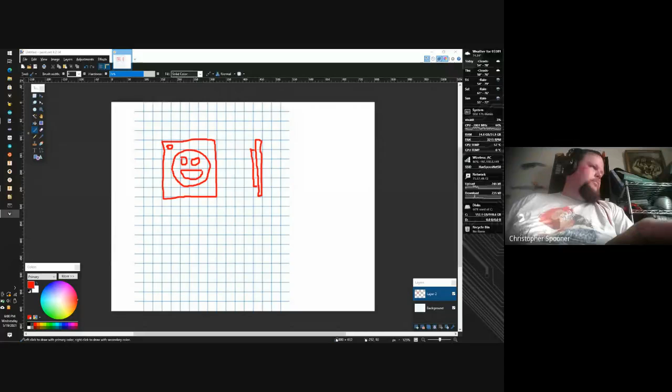For the video, we have this model keyring we're going to build in Fusion. So we're going to start off.

And how do we start any part in Fusion? What was the default way we want to start things?

You're going to make a sketch? Yep, we always start with a sketch. You can build three-dimensionally first, but that's not how I work. I find it harder in a lot of ways, and it's hard to make really specific things.

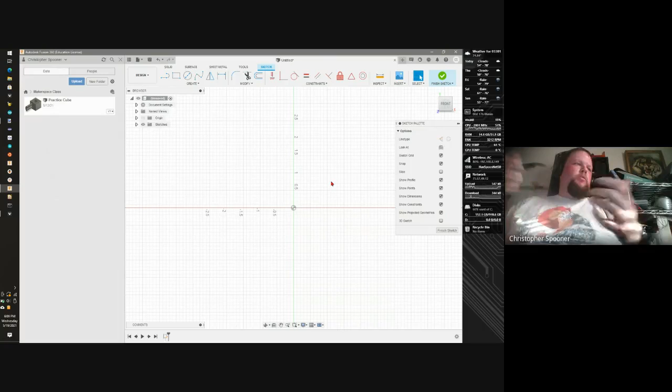So I'm going to build, working towards the front, so I'm going to pick this plane over here. So I'm looking at the front of my key. If you start in a different plane, it doesn't matter. It's a three-dimensional object. No matter what direction we put it, it's going to be fine. It's just going to change which orientation shows up in the 3D printer or whatever one's ready to go.

Now under Create, we have a couple options for rectangles. We have the standard 2-point rectangle, which does the corners. We have a 3-point, draw one side and extend out, or we have a center rectangle.

If I go back to my drawing, I'm going to switch my color. I'll make this pen smaller. If you look at my thing, really all my features are kind of built around the center, around this center point. So if I use a center point square, it's going to make my life way easier.

Does everyone see why that would be? It means when I do my circle, my mouth, my eyes, everything's sort of based around that center origin. So we're going to pick the center rectangle.

I'm going to start on the origin, and drag out and click again. I'm not going to worry about the size or dimension. I'll dimension it after the fact. I don't like looking at the dimension I'm drawing. I find it distracting, and I'd rather work at shapes than specifics.

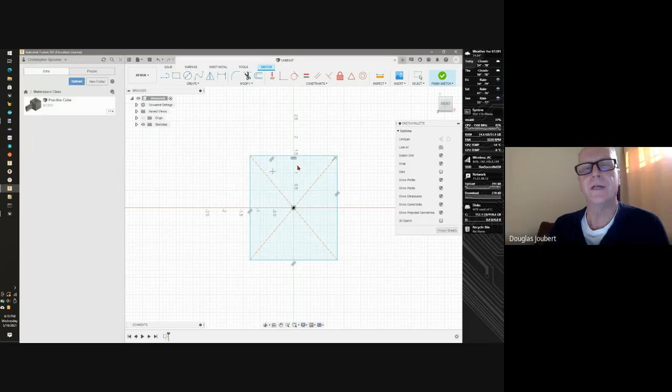Hey, Chris. Yep, I have a question. Of course. Well, maybe I figured. Maybe I know. You went from the center point - the last class, you went from the center point outward, so the cube was kind of attached in a corner. Yep, so what's the difference?

The first time we used the line tool, we built with the line tool, and I started at the origin and drew our shape this way. Now, a square is a square is a square, but remember when we drew our circle, we had to place the center hole on the thing. We had to dimension where that hole goes. If I build from the origin, I can use that origin to build other features. Because my circle is centered on the origin, if I keep my origin in the center of my shape, everything's going to be less annoying.

Got it. Chris, which of the 3 choices of rectangles did you choose again? I'm sorry, I wanted the center point rectangle. Okay, the center rectangle. We just lost Doug.

All right, I'm just going to drag out. I'm not going to worry too much about it - by keeping myself at my center point, center shape, I can use that for later features.

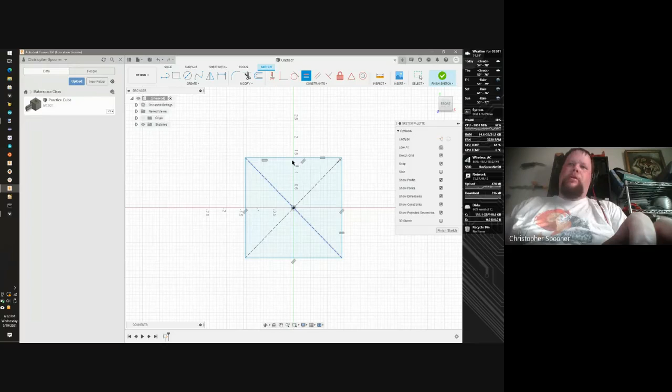Now, before I put dimensions here, I actually want to - because I know I want a square keyring - use the equals constraint to say this top side is equal to this left side. I could also do the top to the right, or the bottom to the right, or bottom to the left. It doesn't really matter. But now if I hit escape and try to drag it, it's always going to stay square.

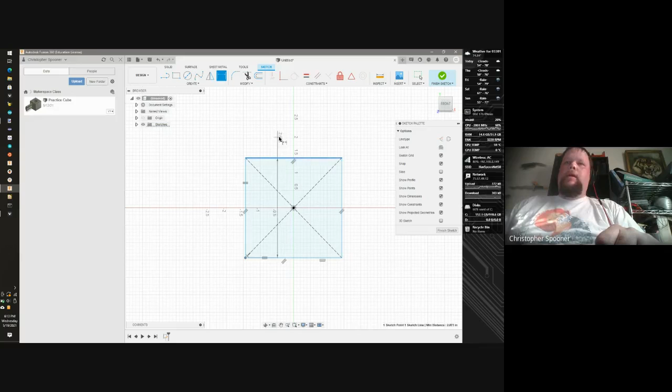All right, we're now going to set our dimensions. I'm just going to grab the top, and I'm going to dimension that way. It doesn't really matter, 1.5.

Notice as soon as I put one dimension on it, it turned black. Why did it turn black with only one dimension? What does black mean? That you are constrained. Yep, that is the shape it is, it has to be that shape, that's the only shape it can be. Because I used a rectangle and said the top and the side are equal to each other, as soon as I set one side dimension, it has to be that shape. There's no other shape it could be.

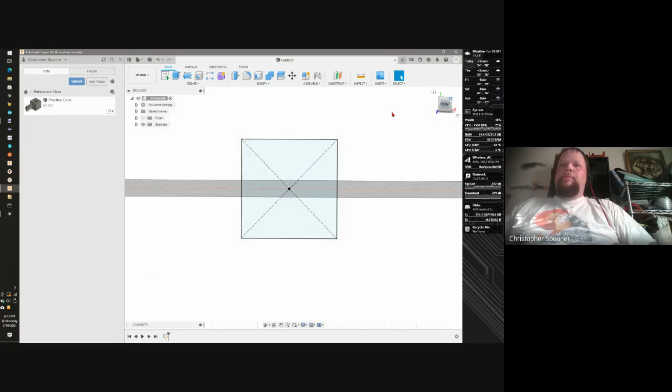So now that I have my square and it's locked in place, I'm going to finish my sketch. I'm going to go look at it three-dimensionally so I can see what I'm doing. And I'm going to extrude it 0.1 - we'll go 0.125, an eighth inch.

Any questions or anything? It's much easier to help you one step at a time than helping you after 4 or 5 steps. So if you get stuck on a step, don't try to just push through thinking you'll catch up, because everything we do depends on the previous step, you just fall farther and farther behind. It's easier to help you first.

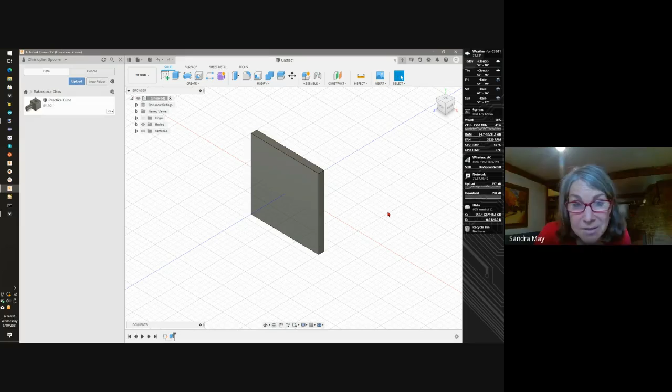You made your keychains 3 inches wide? Nope, 1.5 inches. Okay.

Is there a way I can change my dimensions once I've made it a 3D thing? Yes, you can. All right, let's talk about that right now, actually.

One of the tools I didn't talk about before is the timeline. On the bottom of the screen, we have every step we do recorded. We can go back in time and change things, sort of like Back to the Future. Downside is occasionally we break things and end up in Biff Tannen world. So be careful, because you can break things badly. But most of the time it's pretty safe.

So we're going to double click on sketch 1, and then double click on the dimension, and I can change that to whatever I want, then finish sketch, and it will update. So if I go, I want this to be 1.75, it will update, and that shape is now bigger. It's hard to tell because there's no point of view, but...

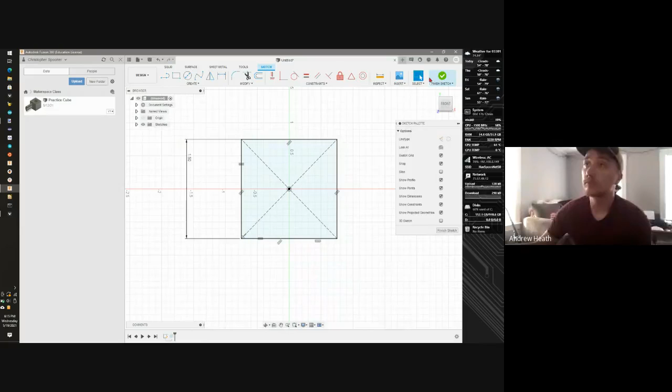We're ready to move forward? I'm ready. All right, so now we have our square. There are 2 ways we can go from here, 2 features we can work on. We could either do the face or do the keyring hole. Again, it doesn't matter which one I do, they're completely separate pieces. I typically do the face first, but you can do either one. I'm going to do the face, so let's start a sketch on the front of our slab.

This is where having ourselves based around the center makes our lives easier. So if I start my circle on the origin, the center is already located. I don't have to locate the circle, I just have to size it.

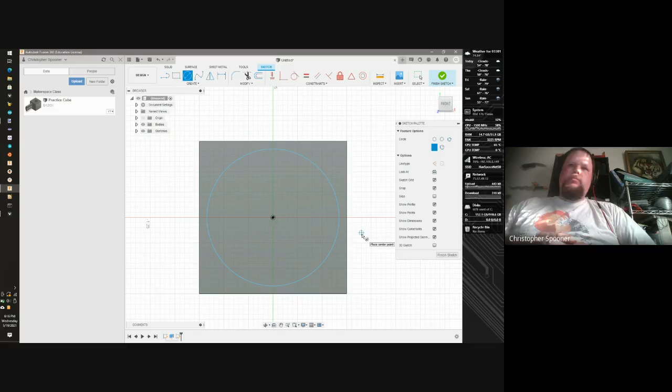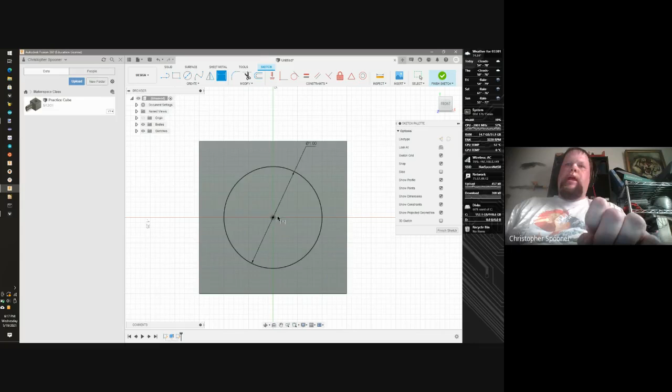Now I'm going to dimension myself to 1 inch. Notice I just had to do 1 dimension, I didn't have to locate the center point of that circle, I didn't have to fight with it. It just places and locks without the dimension. If you didn't have it start in the center point, you'd have to dimension the center to the side and the center to the top or bottom, and say it was 1.5 divided by 2 or 0.75, I'd have to do all sorts of math and I'm lazy. I can just place it and be done with it.

So I'm going to finish sketch, go back to 3D mode, either clicking a corner or clicking the house, and we're going to extrude, grab the circle, and go 1.25... oh gosh, 0.125, 0.125.

I'm going to click back on my extrusion in my timeline and say 0.125. That's the nice thing about working in CAD, I can go back and change stuff as I'm going. 0.125, an eighth inch or eighth of an inch, is a good size for 3D printing. It's also good for laser cutting because you can get plywood in that value. So whether you're laser cutting or doing this for 3D printing, picking nice, reasonable sizes makes your lives easier.

So everyone has their sketch somewhere along the way. Dude, all right, can you share your screen quickly? Because I had it, and then... yeah.

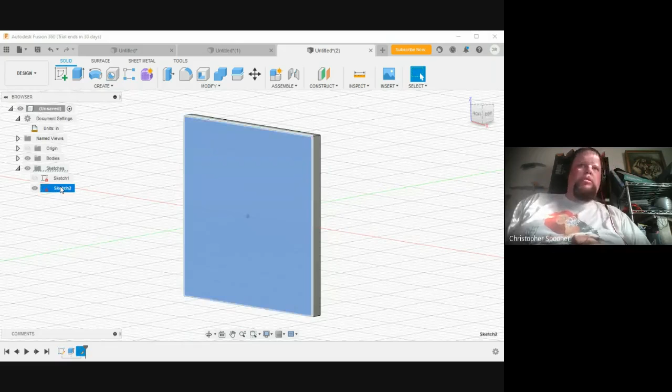Let's double click on sketch 2 so we can take a look at the sketch on the bottom. Yeah, sketch 2 there, that works too. Let's double click on it so you're editing it, and just draw the circle again. I wonder if you somehow...

Dimension, and a hotkey for dimension is D. Click on the outside of the circle. Click again. 1, enter. No, 1. Finish sketch. I wonder if it got dimensioned to 0 somehow. That's the other possibility, is it went to 0?

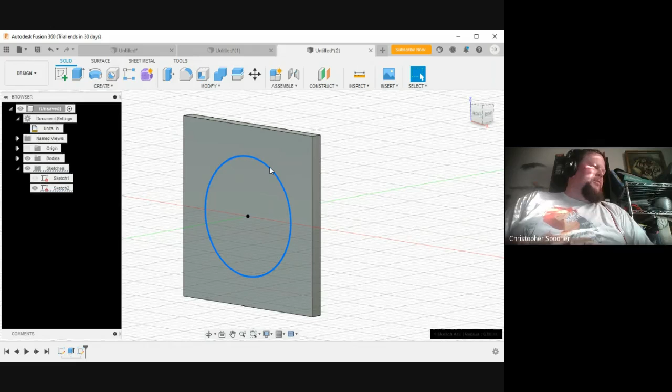As I said in the first class, Fusion 360 is my tertiary CAD software. I reach for Inventor by default, which is Fusion's big brother. And then, okay, we're gonna click the extrude button up top.

It's next to the sketch button. Click on the circle, and then type 0.125 in here? Yep, you can actually type it there or in the little pop-up just to the corner of it. Either one does it. Correct. All right.

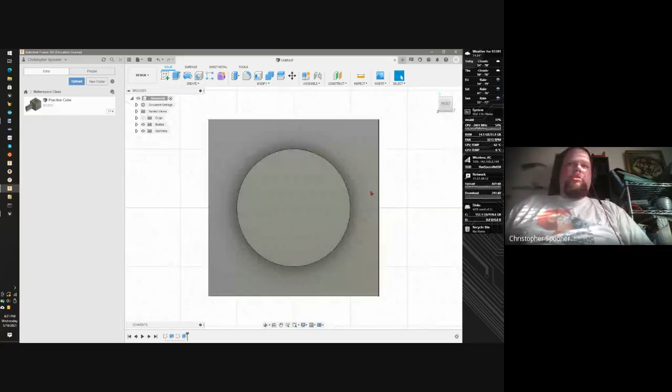So occasionally Fusion will catch me off guard because it's not the one I use all the time, but it's the most convenient for hobbyists. All right, so we have our face. We're doing good time-wise, so let's make this a little fancier. We're going to make our eyes so that they are domes instead of just cylinders.

So what's our next step? What do we have to do before we start drawing the eyes? If you want to create a feature, just start a sketch. Basically, sketch 2D, 3D, 2D, 3D, every time. I'm going to start with a line, and I'm just going. So for reference, I'm going to draw just this left eye, and then we're going to mirror to get the right eye. So we're going to draw like a half circle.

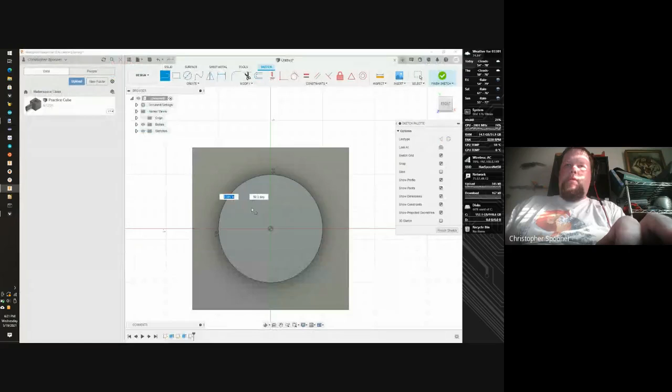So I'm going to start by just drawing a vertical line. I don't worry about the size, I'm just placing it. I'm going to draw it, then hit escape to make sure I'm not in the pencil anymore. So just a line right now.

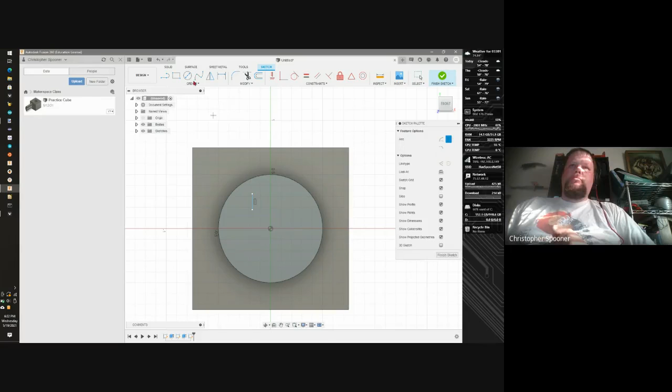Now I'm going to go to the arc tool and go to the 3-point arc. Create arc, 3-point arc. And I'm going to click on the top of the line, the bottom of the line, and then drag out. Let me do that again so you can see that. Create arc, 3-point arc, click on the top, click on the bottom, and then drag out and not worry about it too much. Arc, 3-point arc, top, bottom, drag. It doesn't matter if you go left or right.

We're going to fix this guy as we go. I'm going to hit escape to make sure that's cool. I want to actually demonstrate something. 1, 2, okay.

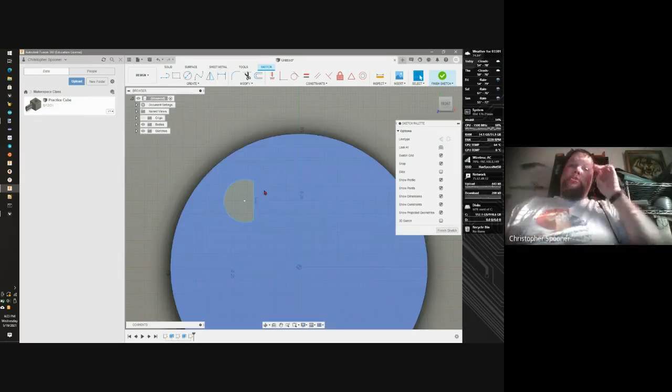First thing I need to do is, if it didn't by default, and I found that it kind of wants to, I want to put this point on this line. We're going to do a lot more constraints this project than we did with the practice cube. In this case, we want what's called a coincidence, I want this point to happen to be on this line. It just happens to happen, so it's a coincidence. So this point on this line, that'll give me an exact half circle. It also locks the center point of that thing and turns it black because that center point is now constrained.

So I should have a nice orange wedge right now, half circle. Now we need to start throwing some dimensions. Can you just do that one more time? I missed how.

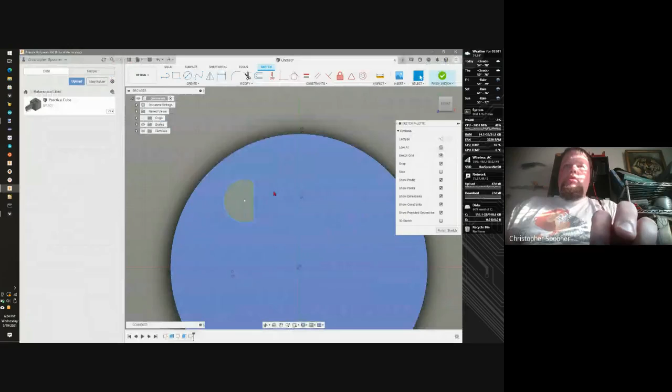Of course, no, that's fine, so I will go back. So create arc, 3-point arc. Click on the top, click on the bottom, click somewhere. This white dot is the center point for the arc. I'm going to use coincident, that this dot happens to run into this line. And the dot should turn black. And hit escape to make sure we're outside that tool as soon as I'm done. I always just escape whenever I'm done with anything, because you don't want to be in a tool and then have it do stuff to you.

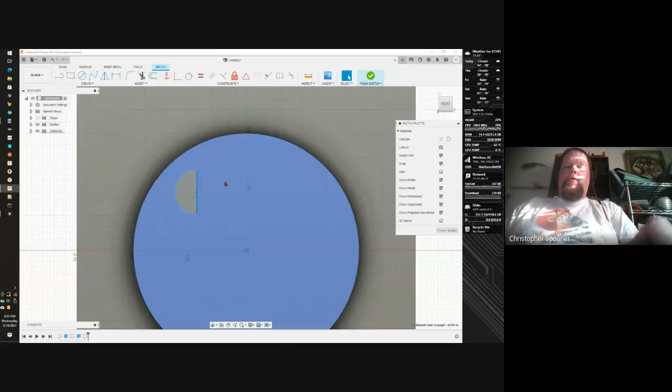Because I've had it all of a sudden start stringing lines and locking things together. So I go back to my drawing. These circles look like they're almost a square.

So maybe we'll go, so I'm going to dimension. I'm going to click on the line. I'm going to set this guy to be 0.2, so not quite, but almost a whole square. If we don't like it, we'll change it later.

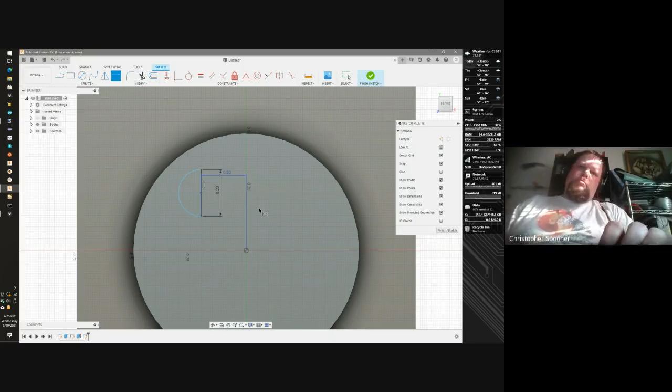Now we're going to dimension from this line to the origin. And I'm going to go 0.2 also. You might find it looks funny. If it does, we can always fix it.

Now, it's not all the way black, and I'm not quite sure why. I actually am, but I want to test it, so I'm going to hit escape, and grab onto it and just see where I can move it. And hey, I can still move it up and down, so that means I still tell it where this is vertically.

So I'm going to throw a third dimension here. I'm going to grab the bottom point of this line, and the origin.

So let's do it again. Dimension, helping me. With the bottom point and the center origin, I'm going to drag straight over this way, and go 0.1. Again, it might look funny, but I can always adjust it later.

So there's a bunch of dimensions on there. Is there a way to... hold on a second, I'm just...

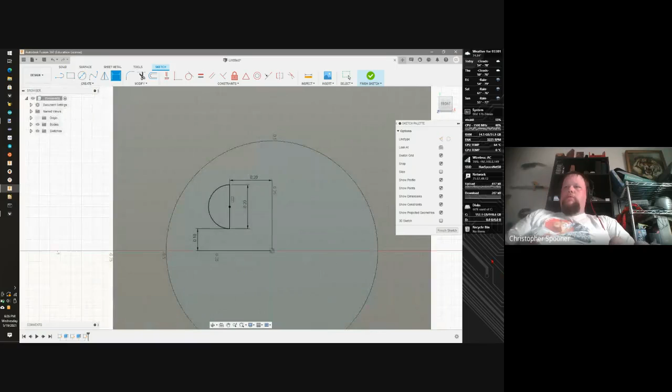Fusion's gonna be angry at me for a second. Oh god. Fusion's very angry at me.

Is that easier to read? Okay.

For some reason, I never thought of changing my screen scaling when I'm doing these, but I should. All right, so now we have our half circle.

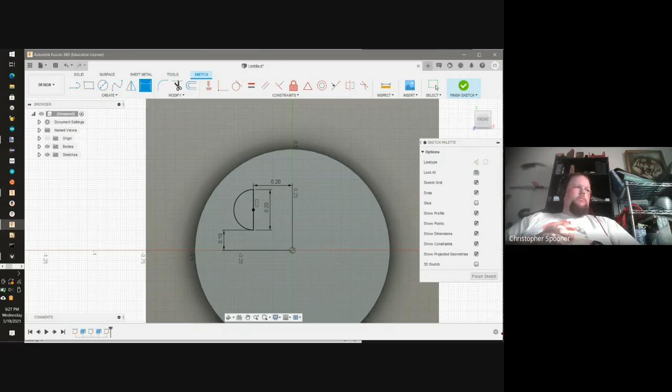Does anyone need help? Why is Inventor opening? Go away.

All right, do you want help? If you do, just share your screen. I'll gladly, yeah, I can do that. Yeah.

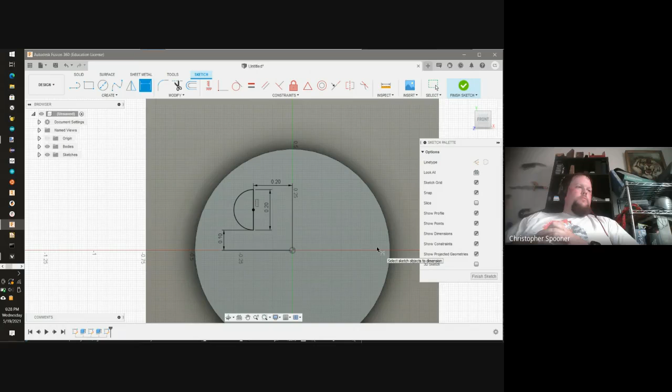That looks good. That's, I think when I go to dimension stuff, I seem to be having issues, like I'm clicking it in the wrong order, or all right. Let's take and hold on, I need to biggen.

And that's what, okay, so can you take and let's do it. Let's take and that's fine. Let's delete that 0.2 dimension because the 0.1's fine.

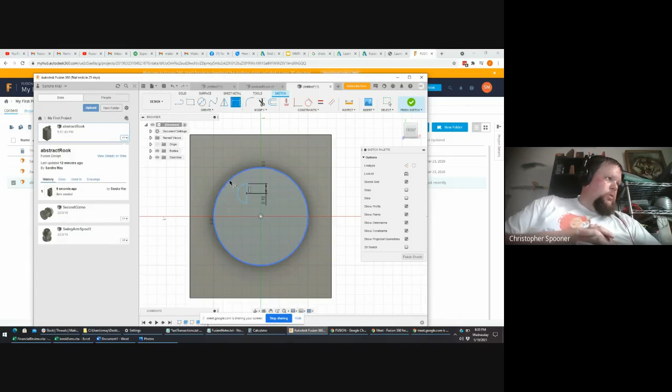Huh. There we go. All right, so let's click on the side of the circle. You're in dimension mode, yep. Click on the side of the half circle, the line part, the vertical line.

Is hit escape, control Z going to work? Just hit escape, just hit escape. Okay, escape. All right, go back to your dimension tool.

And click on the line. So we want to click on the vertical line portion of the circle. And we're going to click on the origin now. And now go move your mouse up and down. Yep, click, good, just click.

Okay, let's make that 0.2. All right, and now let's do the bottom corner of your half circle. Click there, now click on the origin.

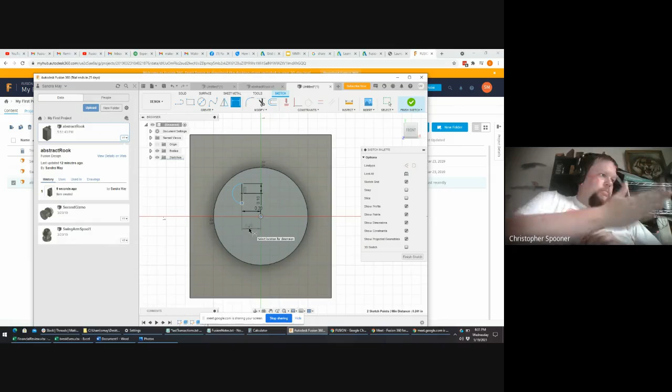And now you move your mouse to the left or right. No, we want to move it left or right of the thing, and you want to make sure you're above the origin but below the point of the thing. Yep, move it down a little bit more. Yeah, right there, click. Yeah, 0.1.

So what's happening, and I can show you on my screen. So let me resume presenting for now. All right, so what's happening? I'll just mention here that Fusion is trying to help you, and I find every time it tries to help you, it often makes things worse.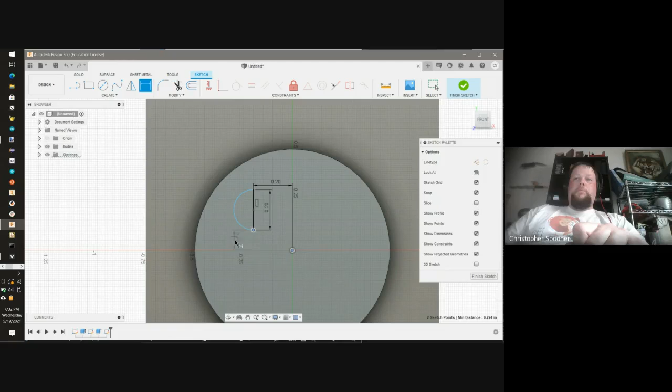So it's trying to guess: do you want a horizontal, a direct, or vertical dimension? And based on where my mouse is, it's going to change the direction of the dimension. And these are all different numbers. This is 0.2, this is 0.224, this one's 0.1. And it depends on which way you're laying your ruler. So you need to be careful which way you're dragging your mouse.

The trick is to always drag your mouse directly perpendicular to the way you want to measure, sort of like pulling your tape measure. Read your lines perpendicular to the direction you're looking at. Does that make sense? If I have a thing, I put my tape measure, pull it out, and read a line going this way. That's what was happening—Fusion was helping you, and it wasn't actually helping you.

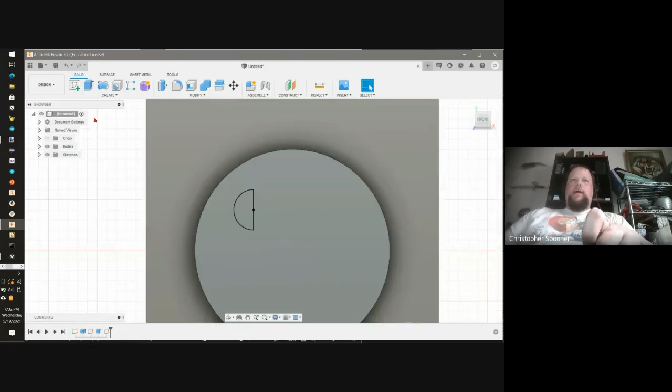All right, so we have our half circle. Is everyone ready to move forward? I'm going to finish the sketch, and this time, instead of extrude, we're going to click revolve.

Now we need two things for revolution. I need to have who are we revolving, which is the half circle, and then I need to tell it what the axis is. So I'm going to click down on axis, click on the line part of my eyeball, and say join. I'm going to make the eyes stick out.

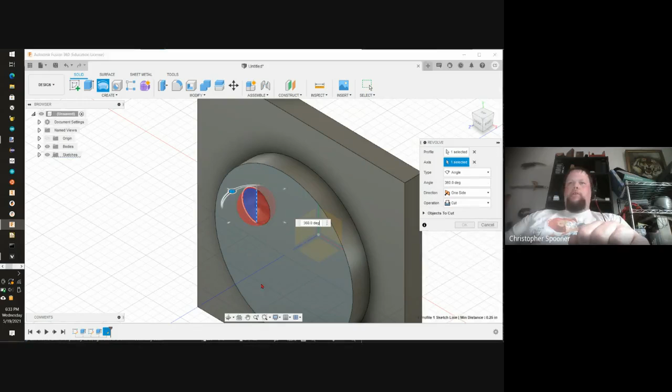Okay, escape, and I'm going to do it again. Revolve. Who do I want to revolve? This half circle. Which way do I revolve about? This line right here. And I want to make it a join.

I could cut it out to make dish eyes. Either one works, both work well for 3D printing, although they will not look great if you don't have your resolution set higher—you get a stepping effect, which you probably talked about in your 3D printing course, I hope.

Have my one-eyed smiley face right now.

Now we really want our eyes to be symmetrical. I could go and start our sketch on another thing and dimension it and all that stuff, but that's awful. Why would I do that?

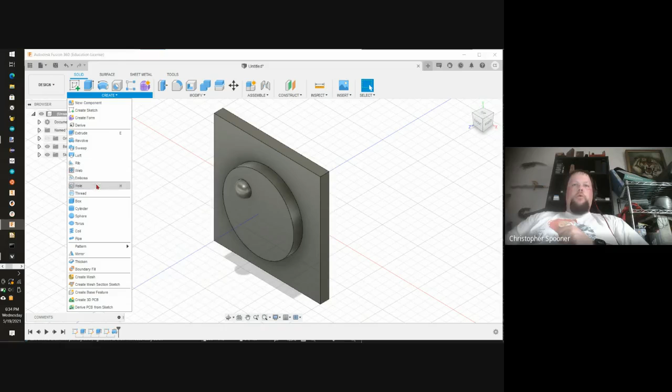There's a tool to do this. Under create, we're going to look down, and we're going to look for mirror.

I keep losing mine when I do things. That's okay, I had the half circle, I did what you did, and then I lose them every time. What are you doing? Let me share your screen, I want to watch you do it because I need to see what's going on.

We're going to hit Control Z. Must be hitting something—let's hit Control Z and see if it undoes itself. All right, I'm sharing. Okay, hit Control Z. Just hit Control Z. I want to see. Haha, you did do something. I don't know what you did, but you did something.

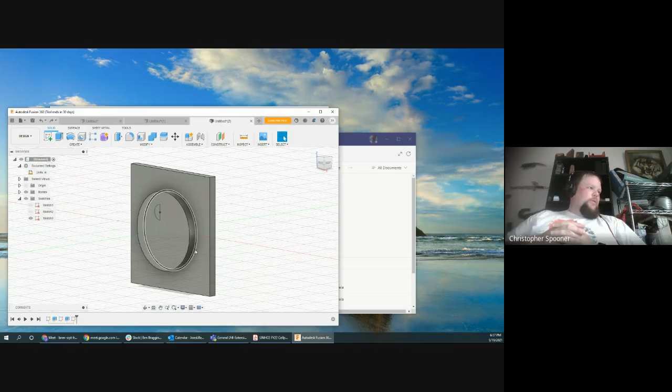Good, good, good. Now hit Revolve—okay, that was in create. Okay, revolve, so good news, you're not crazy. Something weird, I guess. So you need to select the axis. Click on the line part of the half circle, and we're going to go down to the bottom where it says cut and change that to join.

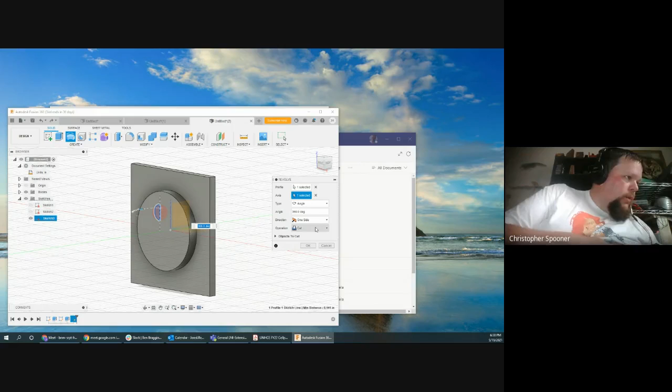Okay, double click on the extrusion 3 at the end. Nope, on the very bottom on your timeline, there's a blue thingy—the last one. Double click on him.

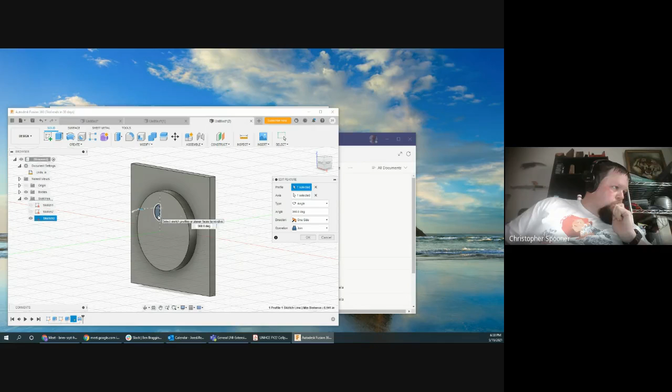Okay, click on... heck, okay, click where it says the first one—first selecting your half circle. Click, good, and I'll go back to the axis. Oh, then click on this. Yep, and then click on the line.

Something's weird. All right, pin this. Okay. All right.

Okay, we're going to Control Z to undo this whole thing. I will undo it so we still have the half circle. Undo, control Z again. Okay.

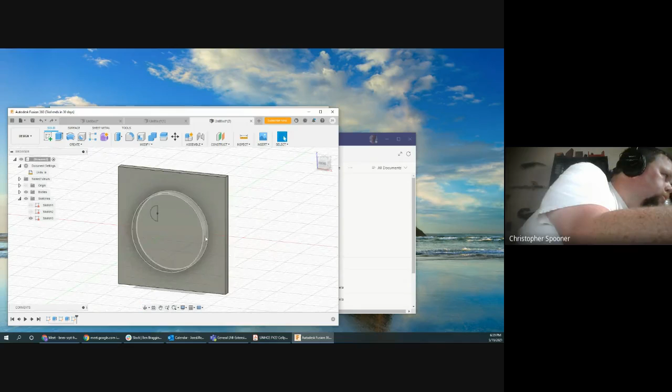Let's hit Revolve again. Yep, hit the revolve, go up to the top. Yep, there, up above it. All right, and we're going to click on the half circle. Yep, and then you're going to click on the edge of the thing. Yep, good, and hit OK.

Let's see what the cut does, I just want to see—do we get a dish? Huh, very interesting, very interesting.

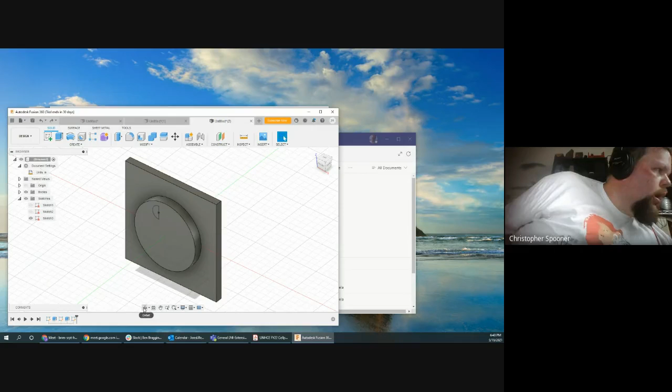I don't know what I'm doing. Sorry, everyone. No, that's fine. Let's go back, let's undo again. Control Z. I see it, I see it. So I need to hold on one second, I need to see how to fix this. So your sketch, you did your sketch on the rectangle, not the circle.

So I'm just trying to figure out how to redefine. Yep, so I'm just trying—hold on one second, I'm just trying to remember how to change, redefine a sketch.

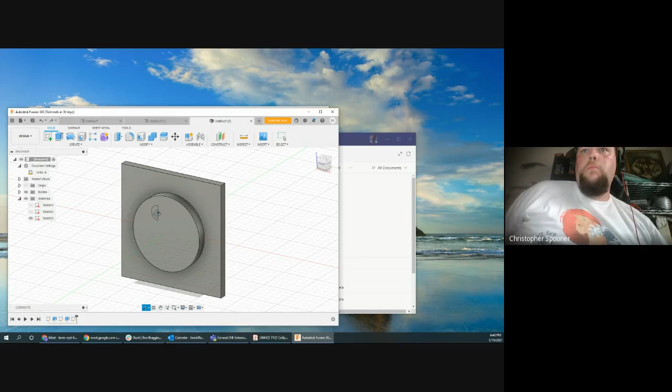Oh, yeah. How do I edit a sketch?

Do you just want me to redraw it on the circle? Yeah, let's do that, I can look next time. There's got to be a way to do it because I can't imagine Fusion won't have a way to redefine where the sketch is, but I don't know where they put that button.

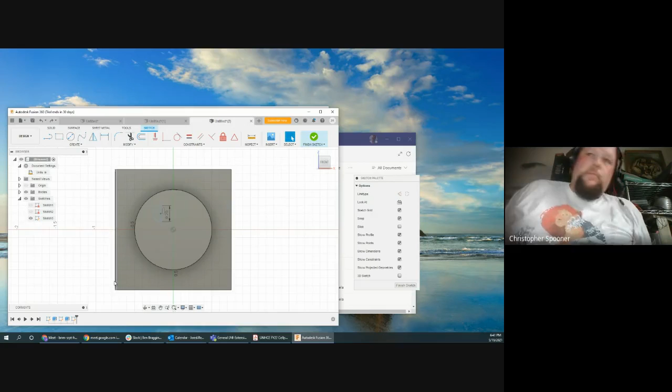Yep, back up. One, keep going. Control Z. Now start your sketch on the circle. Yes, and the reason, there you go. Notice you can now see the grid on top, their graph paper is on top of the circle, not just there. So, vertical line, quickly.

3 point, hit escape. Okay, great. Arc, 3 point arc. Top, bottom, click, coincident.

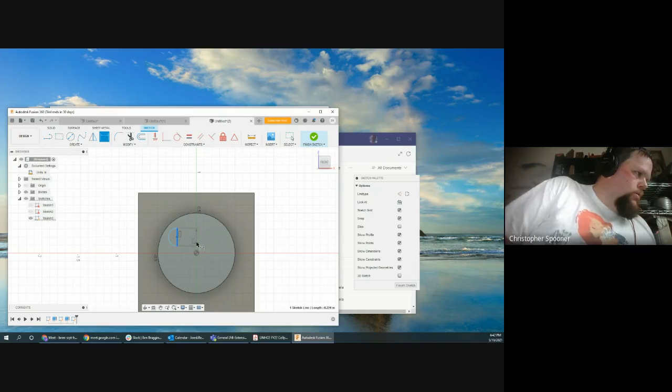Yep, click on the center point too. Dimension, this is the D key. Or click on it, click on the line. Yep, click, drag out, click, point 2.

Now click on that. Yep, click on there, click on the origin. Yep, click, that was point 1. And now one more, the line to the origin and go up. Click, point 2, 2. Yep. Now finish sketch.

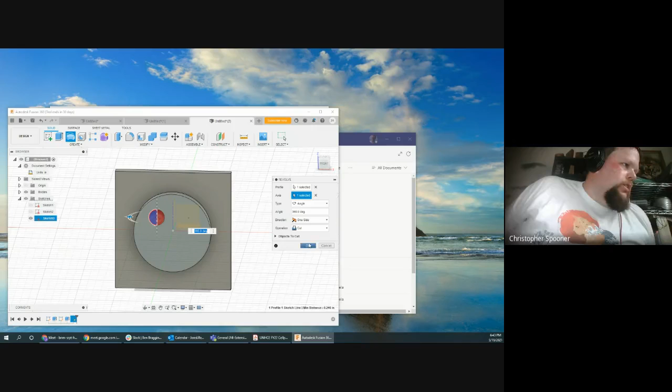Revolve. Click on the circle, click on the axis, select axis, yep, and go. Yep, click on the line. And now change that to join. Hit OK.

And the reason it disappeared was because you were drawing a circle inside the 3D object, so you couldn't see the circle. If you had cut it and then we 3D printed it, you would have had a spherical void where the eye was, and that's what was causing weird problems. It's okay, I will definitely research how to redefine a sketch for next time.

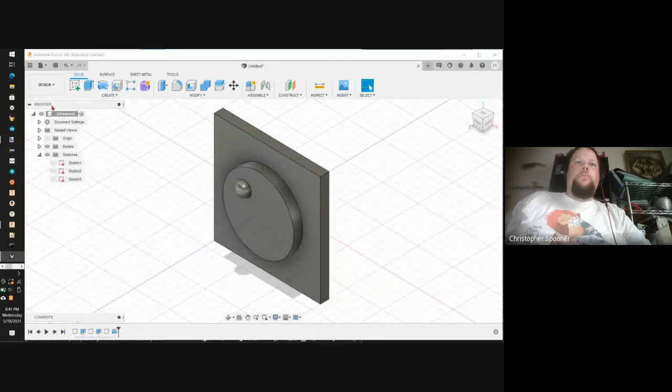All right, so now we have our single eye. We're going to take and mirror this so we don't have to do it twice. So the first thing I'm going to do is resume presentation, and then I'm going to expand my origin so I can see all my things over here. That's the first thing I want to do, click the little arrow next to the origin so I can see all my things.

I'm then going to go down to create, all the way down to mirror. The first thing I want to do is mirror a feature. That feature is this revolve. And I'll do this twice, so don't worry if you miss that. Mirror plane, I'm going to select that plane there and hit OK.

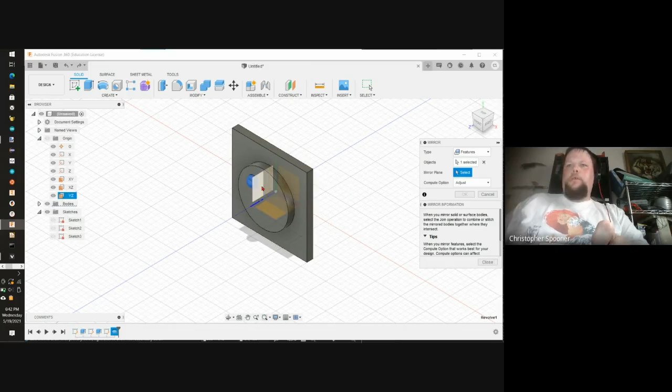Okay, create, mirror. Who do I want to mirror? This circle, and it figured it out when I clicked on the circle. Mirror plane, select that one there, the YZ plane. Hit OK. Boom, 2 eyes.

One more time, mirror, plane mirror, that sphere, or I can click on here. Mirror plane, I can select, I can mouse over them here. That one, hit OK.

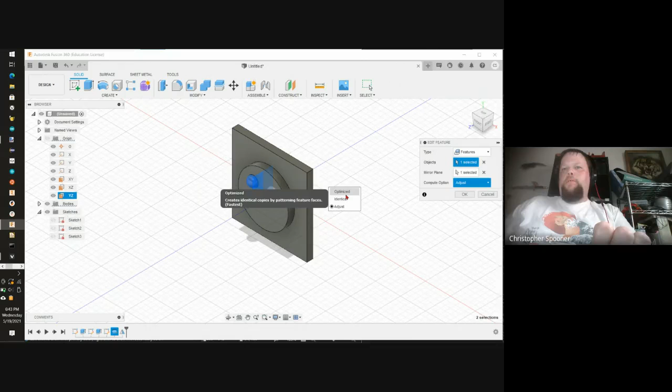What was the last one where it said adjust? Oh, don't just leave it. Not sure what that does. Features, object. Yeah, I don't compute option, I don't. Yeah, I just got default. I'm not sure, that's probably a buried feature in Inventor. I just never had to use it, so it probably matters if the eye wasn't symmetrical.

Do you want it to be mirrored or do you want it to be repeated twice? Like if your eye had a pupil, would you want the eyes both cross-eyed, or pointing the same direction? I think that's what it controls. I'd have to play with it, but I want to get most of our smiley face done. So, okay.

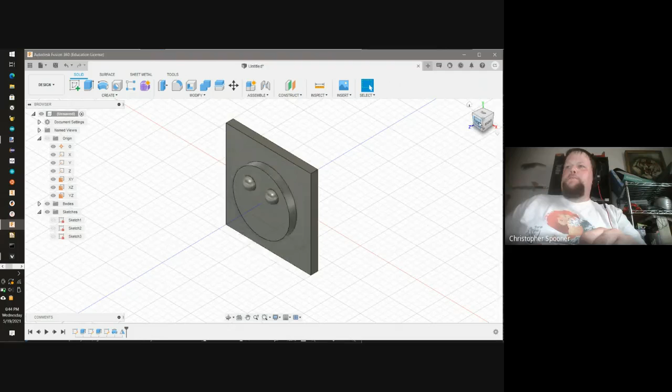There we go. All right, so we have some eyes on our face. Now the last thing I'm going to do, we have two more things left. So we're going to start a sketch, and this time we want to put, we're going to do our smiley face. Again, we want to make sure we select the circle. If we don't select the circle, the smiley face will be inside the thing, you won't be able to see it, as we have demonstrated with Jared's thing.

And we have a couple options for smiley face. I'm going to do the first part here, and then we'll leave you a couple options you can do for the second. I'm going to start with an arc, my favorite 3-point arc. Actually, no, I lied, I'm going to do center point arc. I'm going to select the origin, and start somewhere over here and swing around till I'm somewhere over here.

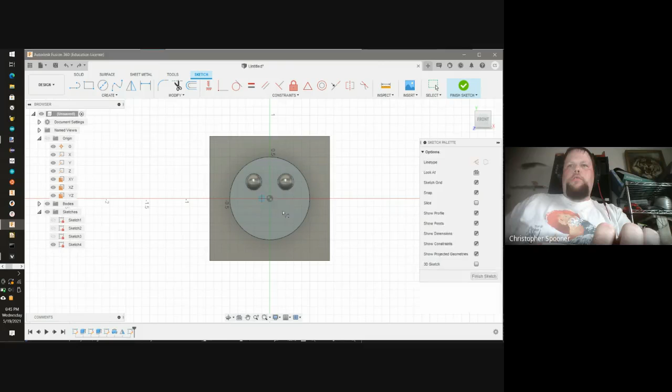I'm going to do that and do it again. So create arc, center point arc. I'm going to grab the center here and go, and right there. Also go left to right to left. So arc, center point arc, select one, from here go click.

Now at this point there's a couple things I could do. I could do a really simple one where I draw a line across here, or something a little fancier, like a second arc between the two, or a 3-point arc between them. But I'm just doing a simple one. I'm going to take a line.

If you want to try to get fancy, you could do an arc, a 3-point arc from here to here, and then like that. But I'm going to do a little one because simple's good right now.

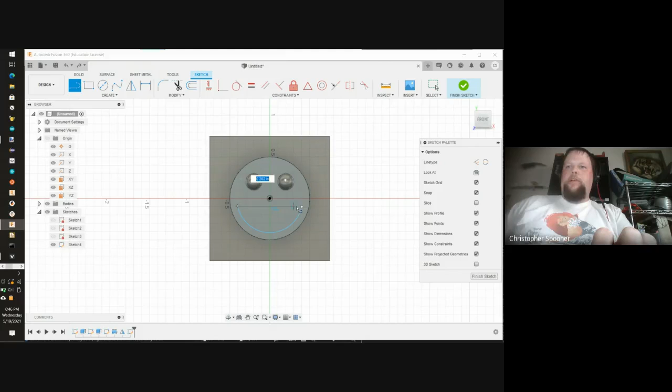Now we still have to lock this in place. The first thing is I could make my thing sort of slanted, but I want my face to be straight. So I'm going to grab the horizontal vertical constraint right here and click on this line. It's going to guess which you want, which in this case I want horizontal, and it guessed correctly.

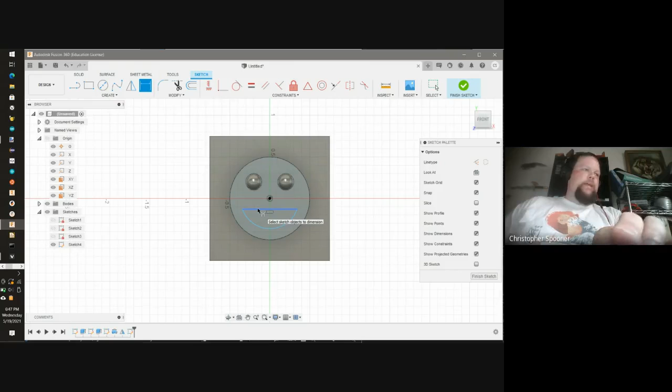Now we just need to dimension it. We're just going to pick dimensions. If you want a bigger smile, make it bigger; if you want a smaller smile, make it smaller. I'm going to make mine 0.75 - I'm going to have a really big smile. So that's how big across. The other thing I need to control is how wide the thing is.

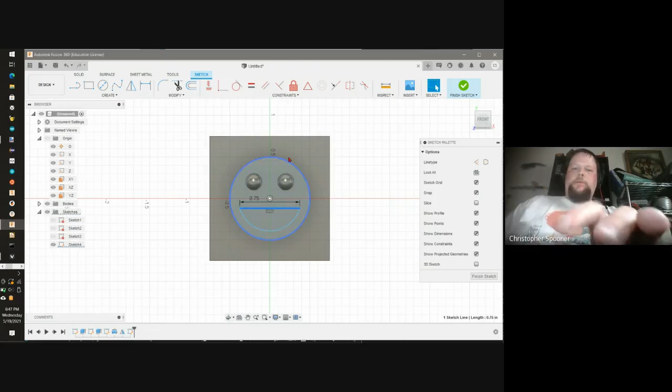I can do it a couple different ways. The easiest is probably doing the dimension from the nose, the center point, the origin, to this line, and doing like 0.1. Dimension from the origin to this top line - that's 0.1.

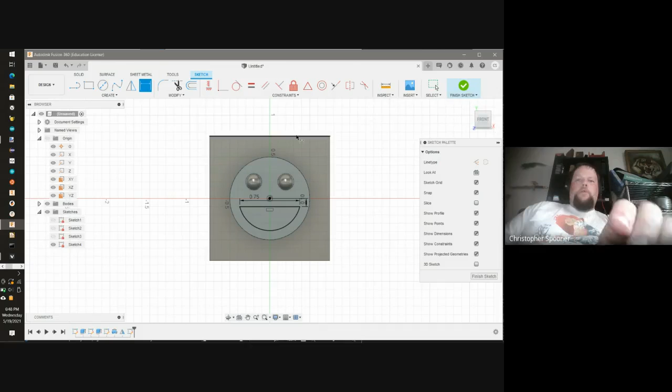All right, if it's all black, I'm going to finish my sketch. And this time I'm going to simply extrude. Select the space. I'm going to go to operation, cut.

And I want to go 0.1. Make sure it's pointed the right way. So extrude - I'm going to grab the arrow, make sure it's going the right way because apparently Fusion sees that better. And 0.1 looks good.

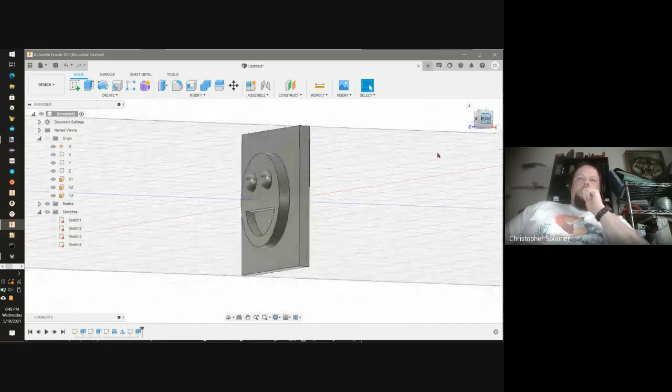Now this is on a slightly different plane than this is. So did your 3D printing class talk about pause printing? Did it, Chris? Did your 3D printing class talk about pause printing?

Pause printing - possibly where you took and you can change the color of the filament. You can print for a while. So I can print from here to here. Well, it's really going to be like that because I'm going to print it that way. From here to here in one color. I can then pause the printer, unload filament, and change to a different color. And I can print up to the back of the mouth in another color.

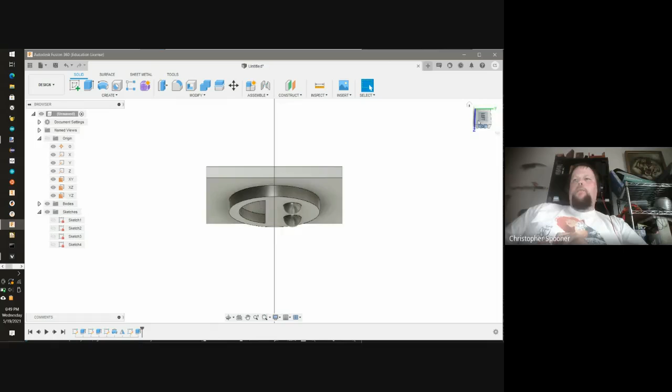Like maybe I want the whole background of this thing to be white. So I print white, then unload the white, and then load black for a short period of time for the back of the mouth. Then I would pause again when I get above the top of the mouth and switch to yellow, print the yellow, and then pause again and make the eyes white again. So I can get multiple color prints out of a standard printer by just pausing and loading, as long as all my features are on different Z heights.

And my smiley face would have a black line around the back edge, but it would look fine. I'll even run that print between this class and next class - I'll run up that 3D print for you guys so you can see it.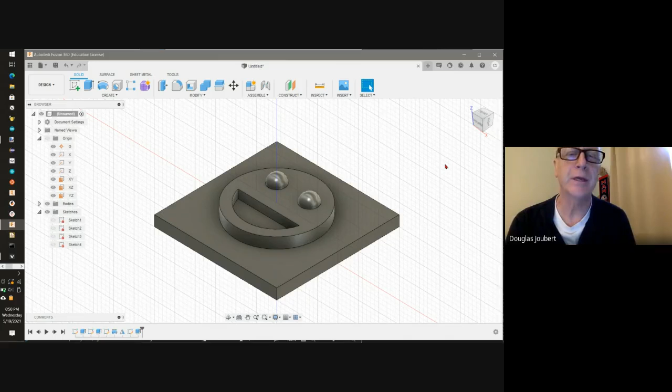Hey Chris, when you talk about pause, are you talking about manually stopping it, or are you talking about having the software or the slicer stop it for you at a certain point? Depends on the slicer - some slicers are smart enough to let you do it. I use Prusa's slicer, which is based on Slic3r, which can do pause printing.

I believe Cura can also do pause printing and automatically set pauses into the prints. MakerBot was not smart enough, so I'd have to babysit the printer and pause it and manually unload the filament. It could go either way. But I prefer my Prusa with the multicolor attachment where I can actually make it automatically change the colors between the prints.

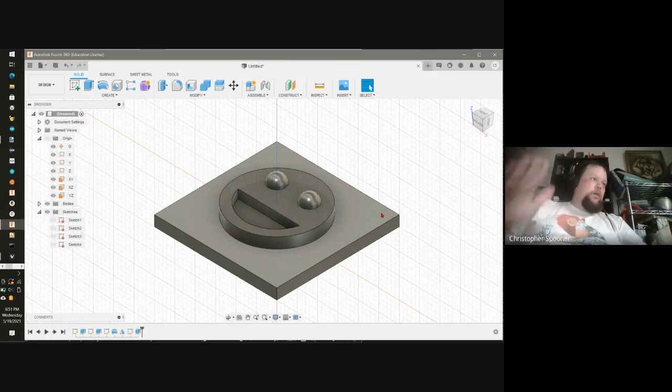You can get some really good multi-shade model things out of a pause print. And if you're printing a whole bunch of them, it's not that big of overhead because you're only changing it once per all of them. So if I was printing like 10 of these, each would print white for a while, stop, unload, load black, print black for a while, pause, unload, load yellow, pause, go for a while, and you could print the whole thing that way.

One of the Spaces printers is a cutie that'll hold two filament spools at the same time. Yep, but I've personally never switched back and forth between the two. It depends upon their slicer software, you might be able to make it change colors at pause. I don't know, I only know my printers. I can figure a printer out very quickly. I have a lot of experience with printers, but I don't know their slicing software and the capabilities without looking at it.

I can show you guys how to make a multicolored print. We'll cover that next class for the cutie. And typically what you do is you end up with two separate models. But let's finish this guy off quickly.

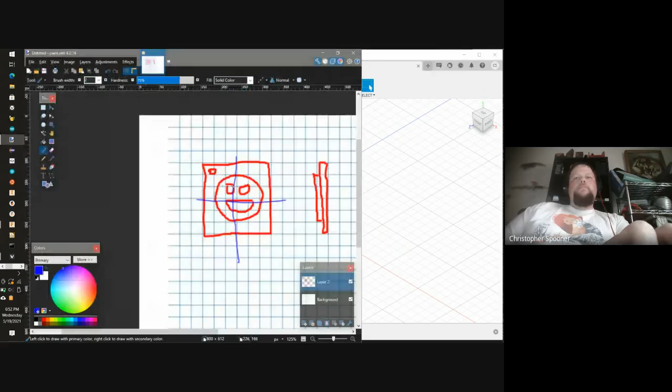So back to my original drawing. Last thing I do is put my keyring hole in. So we're going to do that. In this case, where do I want to start my sketch?

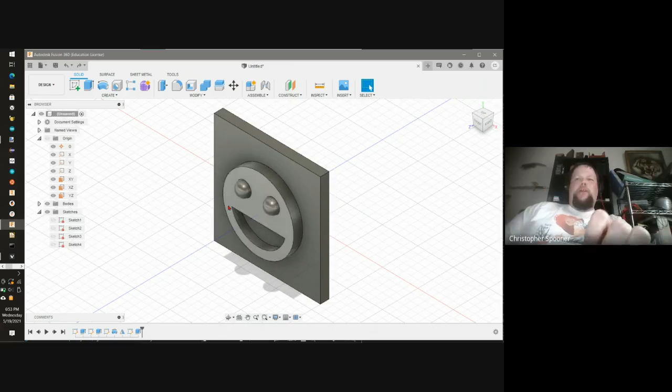So I want it on my face, on my smile, on the eye. I want to make sure this time I select the rectangle. Can I stop you one minute, Chris? I didn't extrude my smile yet because I can't figure out how to reverse the arrow. The easiest way is you either put a negative number in for distance, or you can grab the arrow and drag it. There we go, thank you. Yeah, no problem, you can also grab the arrow and drag it. I don't typically do that because that's not the way I think, because I'm used to older tools that didn't have just grab it, move it.

All right, so we're going to start our sketch on the rectangle. I'm going to draw a circle, just kind of in the corner. I don't worry about the size or location, just as long as it's not affecting anything.

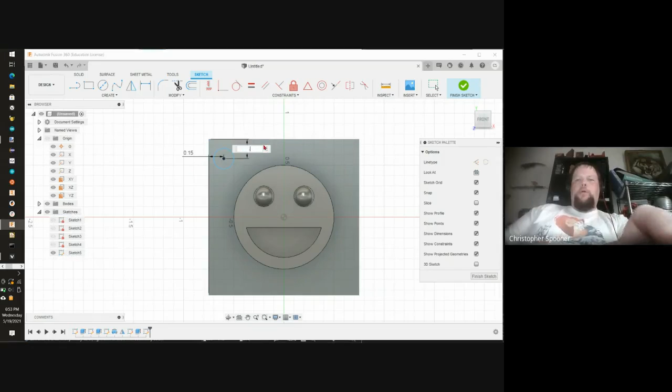Now we're going to take and locate and dimension this. So I'm going to start by locating this. This is something we didn't have to do with the big circle because we drew in the center. This time I have to actually locate it. So I'm going to dimension, going from this point here to this point here, and I'm going to go 0.15. And I'm going to go from the top to the center point and pull straight across and do 0.15. Then the dimension for the circle is going to be 0.125, which is an eighth of an inch, that's available for a keyring.

Staying easier, right? Just drawing the shape wasn't too bad.

All right, I want to make sure I finish up by 7, so I'm going to finish this sketch. And of course, I'm going to share this model with you, and the video will be posted as soon as it finishes rendering, so you'll have that.

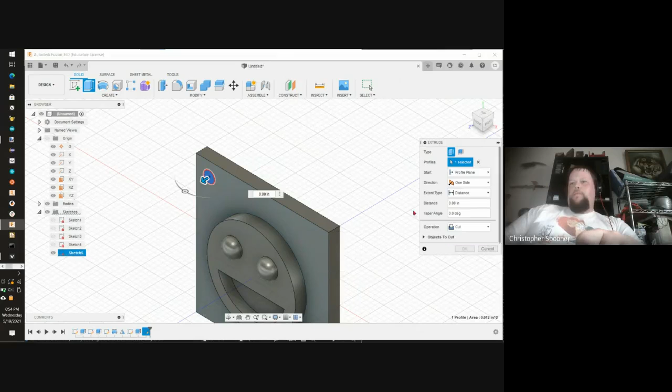So I'm going to take, and we're going to extrude. I'm going to click the circle. I'm going to say that I want it to be cut, and I want to go all. It figured it out for me which way to go, so I'm going to make sure I say all. I'm going to hit enter. And now I have a hole in my thing.

So at this point, I want to show you how to export this for 3D printing. I'm going to save this as smile. And my last step is I'm going to hit export.

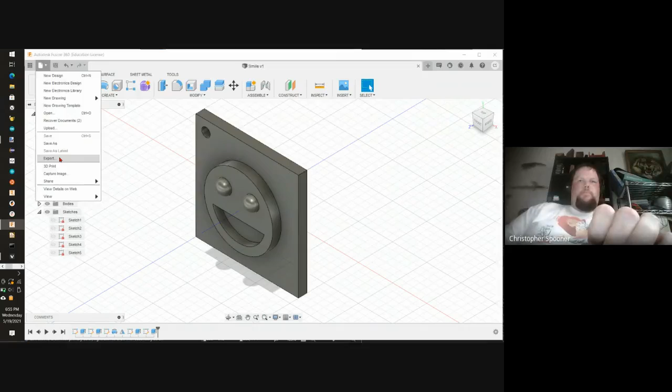The type of export we want is an STL file. So it's under the file menu. Export, STL. And it's going to render it. Apparently it has to do a cloud thing, which is surprising, but that's fine.

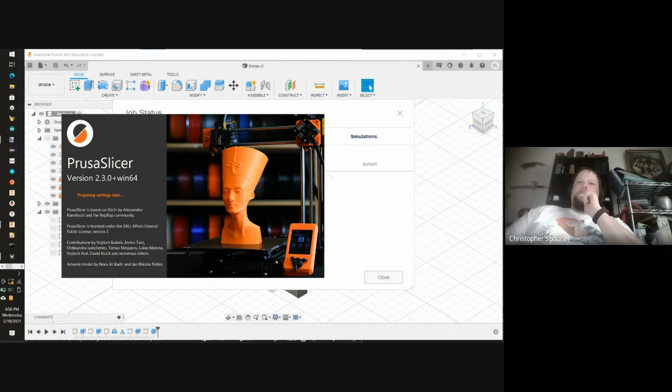Oh, I really can't do anything else. While I'm thinking, I'm going to open up my slicer software. So I'm using Prusa Slicer because I have a Prusa, so that's what I use because I've been happy with them, they're a great printer. The only downside is the Prusa MK3 is a kit, so it does take a little bit to build it, like 8 hours of assembly work.

I'm going to set myself up for the multicolor printer. I'll load white into one, and this part is printer specific so don't worry too much about it. I just want to show you what I was talking about with multicolor printing. I'm going to put yellow into slot 3. Of course, it's going to take forever and a day to export.

Wow, I'm not used to exporting taking this long. All right, so even if we finish up, I'll finish the video by showing you the exporting so you can see what it looks like, and then I'll 3D print that for next class.

A good homework assignment would be to draw up a simple keyring—it could be as simple as your name. There's a text tool, which we didn't talk about. Try to make it, and if you need help or have questions, email me—I'm happy to answer questions outside of class. If you generate an STL file and send it to me, I'll gladly 3D print it since I have plenty of filament.

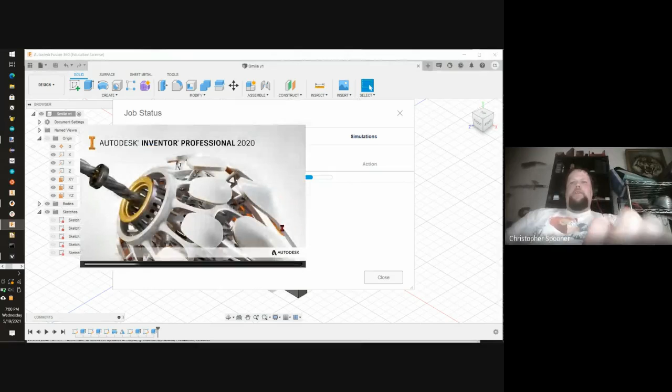Let's see if I can outrun the thing using Inventor. I'll move this Fusion window over to my other screen, and I'm going to do the same thing in Inventor. Let's see how fast I can do it.

Oh, I guess it's finished—it actually finished before I could even start, so I guess it won. All right, so I finished and downloaded. I'm going to take it and go—it's in my files. I drag that and bring it into Prusa, into the Prusa Slicer.

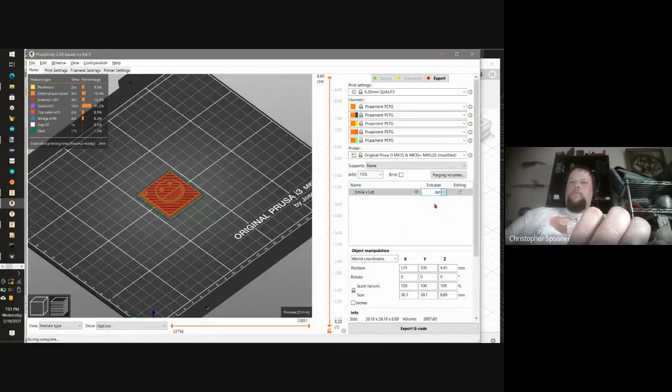I'll start with printing with filament 1, then add some multicolors. I'll go to the first layer that changes and add a color change to extruder 2. Then I'll go until the spiral finishes, right there, and add a change to extruder 3. Going up to the start, I'll add a change back to extruder 1 again. Then with a keyring with some eyes, it's multiple colors, just there.